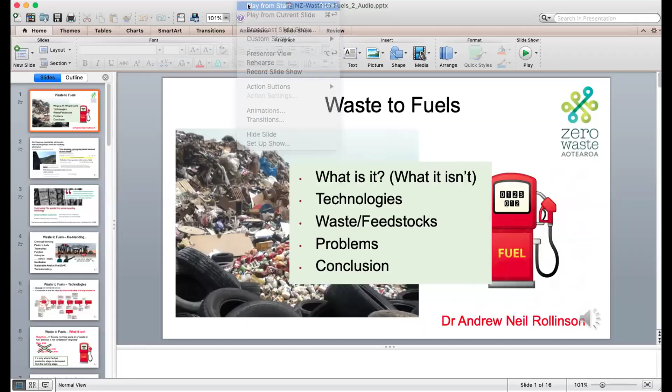Good evening, everybody. Firstly, I want to say what a pleasure it is to be here starting this series of presentations on waste to fuels, and to be working again for Zero Waste Aotearoa. My name is Dr. Andrew Neil Rollinson. To give you a little bit about me, I obtained a PhD in chemical reactor engineering, energy from waste, in 2011. I worked in academia for a number of years with gasification, and for the last 10 years I've largely been helping environmental groups across the world as a technical advisor.

In this presentation, I will be describing what waste to fuels is, the technologies, the waste, the feedstocks, the problems that there are, and I will finish with a conclusion.

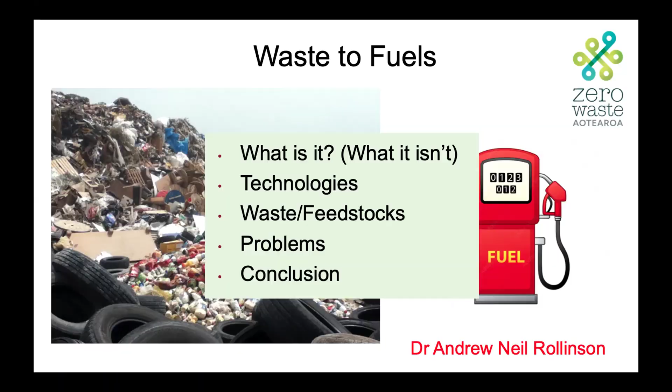This is a different type of technology - sachet recycling in Indonesia using a solvent. This was a plant that was suspended in 2021, and you can perhaps read the quote in the top right-hand corner: someone visited the site and saw bright blue effluent coming out of the facility, flowing into an adjacent river. I'm showing you these news articles because I hope in the next number of slides you will get an understanding as to why these plants close and what these news articles are referring to.

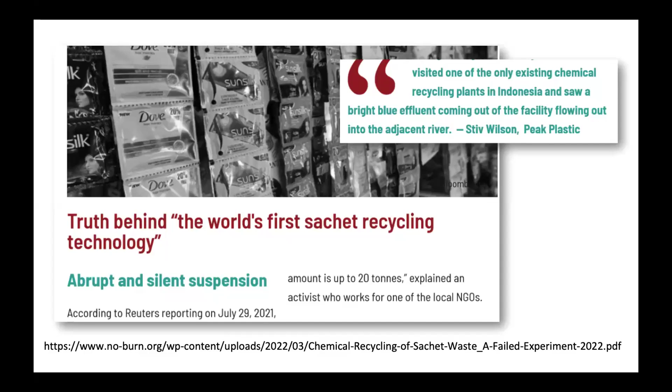Firstly, there are some semantics surrounding waste to fuels. It's often called chemical recycling or plastics to fuels, with a number of terms ending in 'olysis'. Olysis is Greek for change. So thermolysis is changed by heat, pyrolysis is changed by fire, and solvolysis is change using a solvent. There are other types of olysis, usually starting with the name of the solvent used, such as glycolysis or methanolysis.

Gasification is a form of pyrolysis, and there are industry jargon terms for aviation fuels. I have intentionally finished with thermal cracking to highlight that these are not new technologies.

They were experimented with in the 1950s. Plastic had been created then, and engineers and scientists were looking at whether this plastic, rather than sending it as waste to a landfill site or an incinerator, could be converted into something more useful, such as a vehicle fuel or a new plastic.

It was called then thermal cracking - the thermolysis and pyrolysis versions were called thermal cracking. These technologies were rolled out at large scale by the petrochemicals companies in the 1980s and 90s, and all abandoned for technical reasons. So the point I'm making is what you're seeing here is not a new technology - it's essentially a rebranding of an old technology that was trialed and failed for technical reasons.

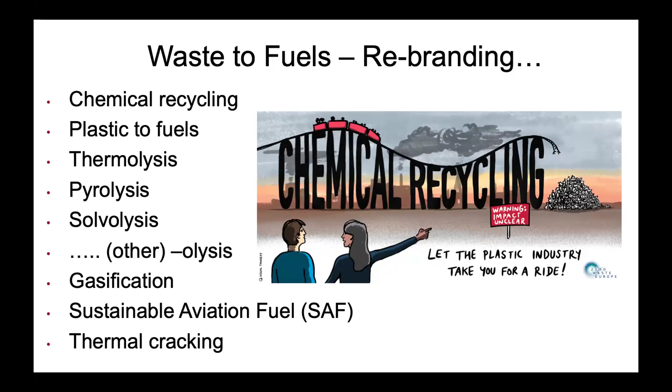What's important to remember is that these technologies described in the previous slide are not recycling. They represent the first of a long processing line, so what they produce is not good enough to be made into any quality fuel. It needs extensive upgrading involving lots of fossil fuels, emissions, hydrogen, catalysts, etc.

And it's a chemical process, not mechanical. You may have heard of mechanical recycling, where plastic is just melted down into fragments and then remelted and reshaped into a new material. This is a deeper type of recycling involving chemicals.

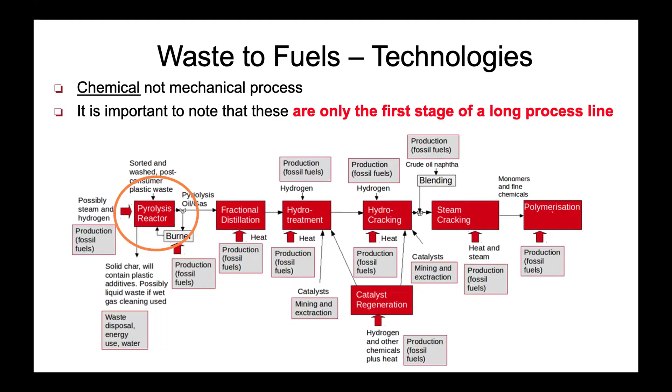What waste to fuels isn't, is recycling in Europe. So burning waste in a waste to fuel process is not legally recycling in Europe. It's a grey area whether incineration, waste to energy, or energy from waste - other terms for incineration - could be considered waste to fuel, because it's essentially used as a fuel to generate electricity. But in this presentation, I won't discuss these any further.

What I will define waste to fuels as is only where the fuel production stage is decoupled from the burning stage, which I hope makes sense. So it's to make something that can be later used as a fuel.

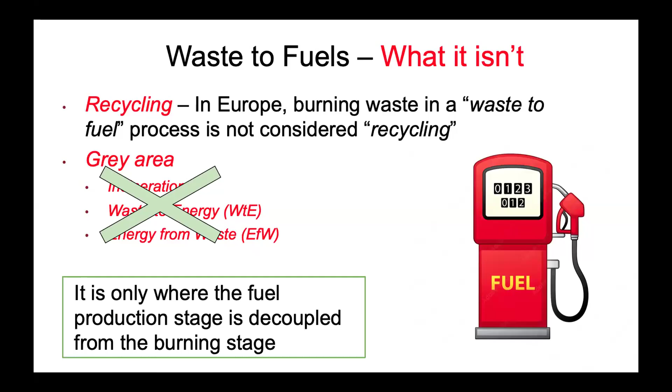A number of feedstocks from waste have been proposed: municipal solid waste, which includes domestic or commercial waste, single types of plastic, mixed plastic, end-of-life tires, sewage sludge, processed waste, refuse-derived fuel or solid recovered fuel. That is a reconstituted municipal solid waste, so it will have been subject to shredding and the removal of certain materials like metals or perhaps some chlorine, but it's still highly mixed, highly heterogeneous.

I've placed in red there biomass, biodiesel, and bioethanol. Now, these are established biofuels, often from agricultural crops rather than waste, and for that reason I have set them outside the content of this presentation.

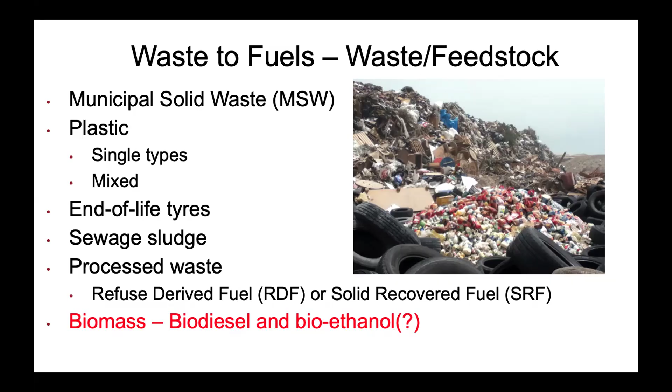Pyrolysis then, let's go into details - what is pyrolysis? Many of the techniques are based on pyrolysis. So look at the picture of the match: strike a match, and then a flame is produced. But the flame is not the burning of the match stalk itself - it's the burning of gas coming off the match stalk, and that gas is pyrolysis gas.

The same happens with the burning of logwood on a fire - the flames that one warms oneself with are the burning of pyrolysis gas. So pyrolysis is an early stage in all combustion.

So with engineered pyrolysis, the principle is to set things burning, but then stop oxygen getting in, so that over a number of days, in terms of charcoal production, the material will smolder away and produce an oil and a gas. You can know this from when you snuff out the oxygen in a fire or stove, your chimney gets a tar substance in it - that tar is condensable pyrolysis oil and gas.

So the oil goes on to be upgraded into fuel when these technologies are used for waste fuels. The gas can be burned as a fuel with the oil directly, and the char is also combustible, but that should not be used for waste because it contains a lot of toxic elements.

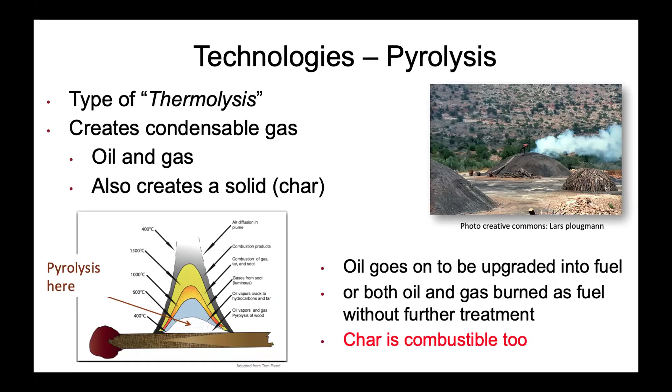Gasification is pyrolysis plus. It's pyrolysis at its core. It is a little bit different because in the 1920s and 30s, when this technology was at its peak, lots of ingenious investigations found a way to make the gas a little bit cleaner so that it could power an engine. It's not a simple process, but that is what the gasification route to waste fuels does. It uses ingenious reactor design, and here the gas rather than the oil is sent off for later processing to be used as a fuel.

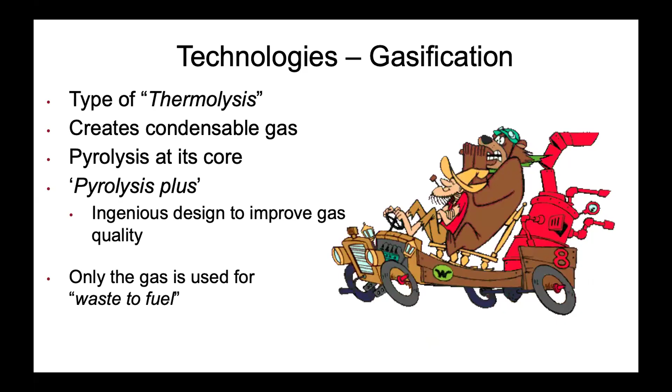Solvent-based techniques still use heat, still use pressure, so they could be a form of thermolysis, but they use chemical solvent to dissolve, I'd say in all cases, plastic, ideally single types of plastic. They may use a catalyst, they may use hydrogen, and that produces a substance that can be stripped out of the solvent mixture and essentially, in theory, sent for further processing to be used as a product.

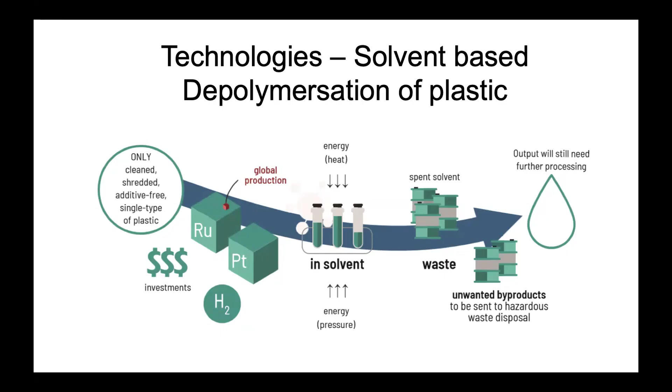Looking at pyrolysis problems now, I'd say that there are three. The first one is it's energy consuming. It's endothermic. It needs a lot of fuel to heat the reactor. Some of that could be supplemented by burning the gas and oil itself, but that obviously reduces the efficiency of the process. But usually it's natural gas that's burned in copious amounts around a pyrolysis reactor.

The second, perhaps more fundamental problem, which the quote shows there from 1871, 150 years ago, it's fully established, it's well known that pyrolysis does not break down materials into the building blocks from which they were first created. It gets to a certain point, just short of the optimum for breaking down products, where different reactions take over and they produce unwanted chemicals. In this case, we're talking about polycyclic aromatic hydrocarbons and dioxins.

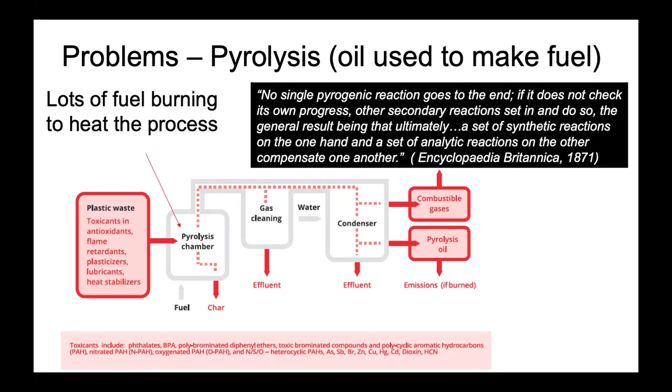Now, the gasification process uses the gas as a fuel, as I've said, rather than the pyrolysis process using oil. It cannot tolerate heterogeneous feedstock. This has been known for 100 years. It's to do with how the material is fed into the reactor and how it packs in the reactor, stopping heat flow and causing the gas to be unclean.

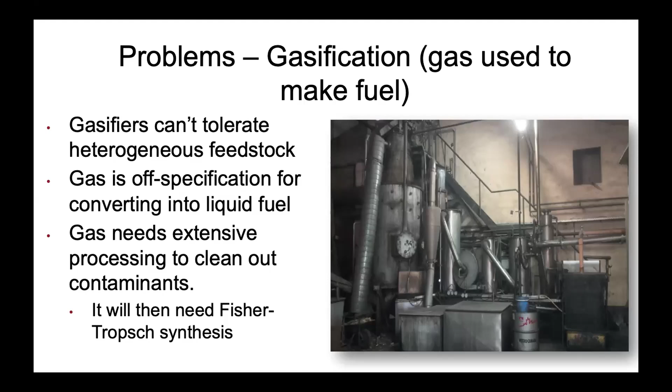There are different types of gasification reactor, but they all have their issues. But in short, the gas would need extensive processing to clean out contaminants before it can be made into, for example, an aviation fuel. Now, this is the route for aviation fuels, gasification followed by usually Fischer-Tropsch synthesis.

Now, with sustainable aviation fuels, the bar is raised very high because the fuel, for safety reasons, needs to match very strict standards, understandably. But the fuel also has many other uses on the plane, such as driving hydraulics. And because of the cost of jet engine aircraft, it must be a drop-in type alternative to kerosene.

So the gas, as I've mentioned, is too off specification for Fischer-Tropsch synthesis. As you can see from the quote there, impurities from waste such as nitrogen, chlorine, sulfur, tar, and soot would deactivate the catalyst. The unsuitable hydrogen and carbon monoxide ratios need gas cleaning stages on top of other additional processing.

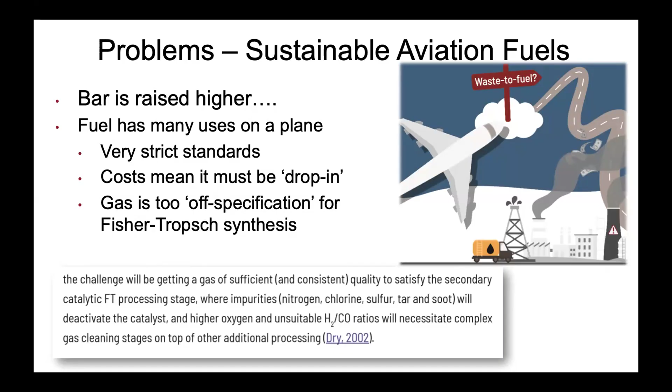Solvent-based methods have their own issues. They require lots of solvent. Industry doesn't usually admit this. They say it's for proprietary reasons, but the ratios are about 10 or even 30 to 1, the amount of solvent per amount of waste. And these solvents are hazardous. They can be regenerated, but regeneration needs energy input.

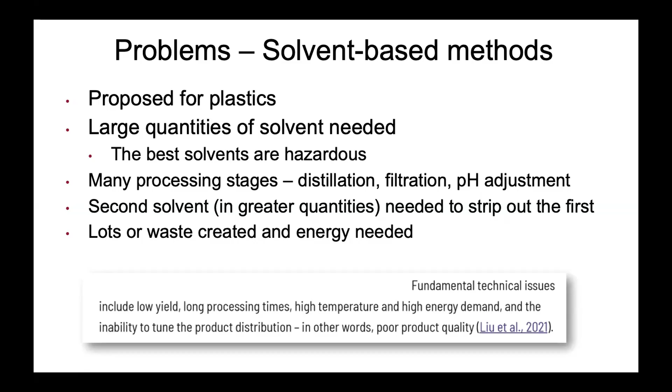For fundamental reasons, I hope I've shown you that yes, you can make a crude oil or a crude gas from waste. But unless you just burn it directly, close coupled to the reactor, you cannot make it into an alternative to vehicular fuel because of the poor quality of waste.

As the title says, you cannot simply turn rubbish into gold. All the additives in it, and also because of the nature of the processes—pyrolysis, solvolysis, and gasification—they

are not suitable for doing what industry wants them to do. Now, you can tag on lots of processing at the end. It might be achievable, but the economics are going to be unfavorable. The waste production is going to be high.

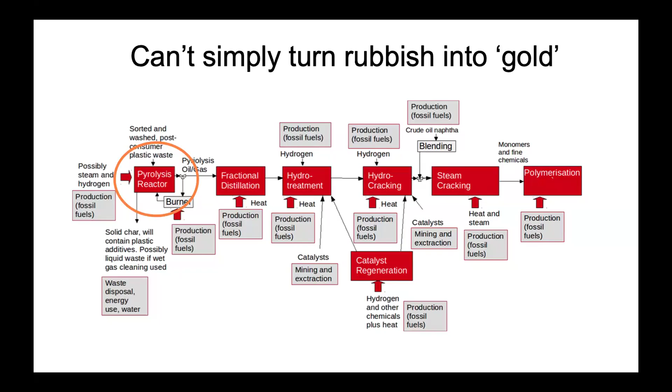The amount of energy needed is going to be high, and it totally undermines the sustainable claims of the process. Now, this is all because of what's called the second law of thermodynamics. You break something down, you've got to rebuild it again. And the more complex the substance, the more difficult it is to rebuild. It's called entropy. I'm not going to explain this in more detail, but it's basic engineering fundamentals.

So if you want to do something with waste, the most sensible option is to minimize its complexity. Remove or disclose plastic additives. Currently, there's no mandatory right for industry to disclose the additives it puts into plastic. Design for recycling, improve upstream source separation, or make products that are repairable.

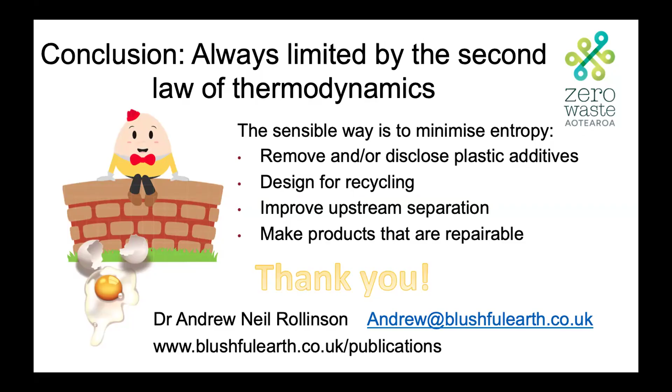Oh, thanks so much, Andrew. That's great. Really appreciate your diagrams for showing us how many processes exactly you have to go through after that initial one. Really gives you a feeling of how complex these processes actually are.

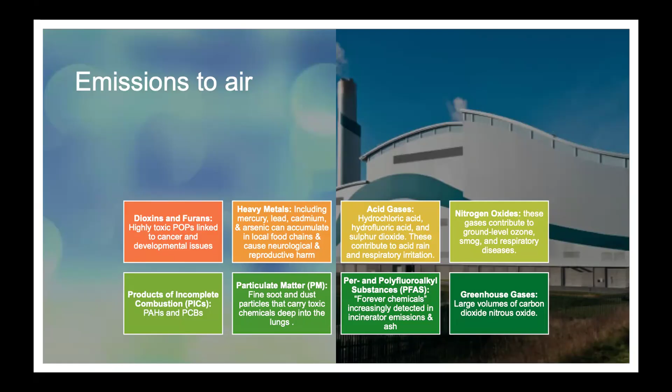Included in this is sort of nanoparticles. I want to talk about this because, being so invisible—even more so than microparticles or microplastics—these nanoparticles really fall off the radar because of their invisibility. And because they're so small, they are very difficult to research, including sources, pathways, fates, impacts, exposures, and so on. So nanoparticles from waste to energy incinerators are ultrafine particles, less than 100 nanometers in diameter.

They're emitted into the air from the burning of consumer nano waste, or waste that becomes nano waste, or they're formed during combustion. Their primary hazard lies in their ability to penetrate deep into the lungs, into the bloodstream, and carry toxic chemicals directly into the body's organs. This creates oxidative stress and disease at the cellular level. They can disrupt critical cell functions, impair mitochondrial activity, and generate reactive oxygen species, or ROSs, that lead to severe inflammation, and they've been linked to increased respiratory and cardiovascular disease.

And then, of course, I have to talk about the environmental impact, and we know as New Zealanders that when we harm the environment, we harm us—there is no distinction between the two. When nanoparticles escape the plant, they settle into soil and into aquatic environments. So we always need to think, when looking at consents for these things, that there are different pathways—it's not just to air, which is often the way these are consented, but also to water and into soils, in aquatic environments.

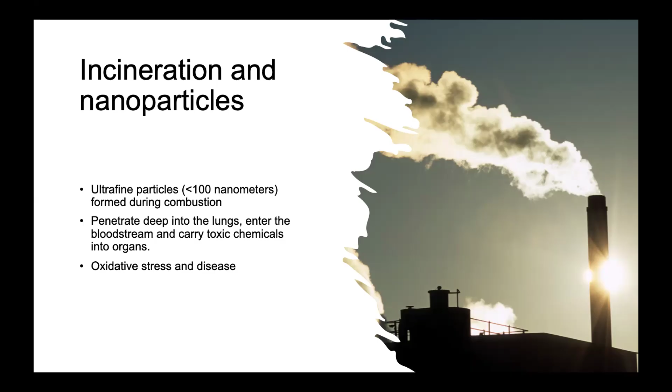These technologies are often referred to as landfills in the sky. Essentially, we're just transferring the waste in solid form into another form of mass. So the amount of municipal solid waste appears to most of us to be greatly reduced when it's incinerated, but no technology can make things simply disappear. Mass can neither be created nor destroyed, it can only be changed.

The gas, smoke, liquid, and solid waste that leave a facility will have the same mass as the solid materials entering the facility. Masses of gas and particulates will go up the stack, toxic ashes and solid waste will need to go to landfill, and liquid waste will also need to be managed.

And then there's the chemical emissions as aerosols from the emissions and fumes and so on. Emissions to water are quite often forgotten about when consents are submitted. Dioxins can be found in scrubber water effluent, where wet scrubbers are engaged to strip flue gases.

If we assumed a plant feeds 40 tonnes of municipal solid waste feedstock, an equal amount of water would be needed, including to clean the feedstock to the point it could be utilised in the plant. So 1 tonne of water per 1 tonne of waste. Operators seldom announce how liquid effluent will also be safely disposed of.

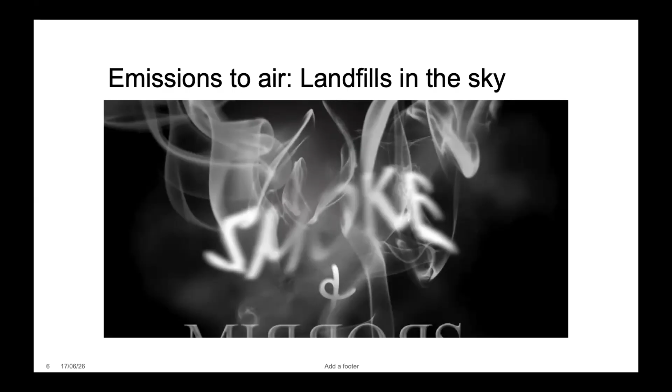We need to think not only about these emissions I've just noted, but also what happens in terms of residuals, the spent scrubbers, filters, and so on, once they've got past their due date. Scrubbers are designed to filter out harmful substances from the exhaust gases, concentrating pollutants like lead, mercury, cadmium, and POPs such as dioxins and furans.

The sludge from the filters is highly corrosive and alkaline. The toxic chemicals and salts in the sludge can easily leach into soil and groundwater if untreated and exposed to rainwater. In many jurisdictions, such as the EU and the UK, air pollution control residues are strictly classified as hazardous waste and require specialised management.

Because of its toxicity, the scrubber sludge generally can't be dumped into standard landfills, and it will require stabilization or solidification - often mixing it with cement or other binders before it can be securely deposited in hazardous waste sites. So it's also where it goes at the end that we need to think carefully about.

Particularly when proposers of these technologies are proposing that their scrubbers, for example, can remove 100% of endocrine disrupting chemicals, can remove 100% of particulates, and so on and so forth.

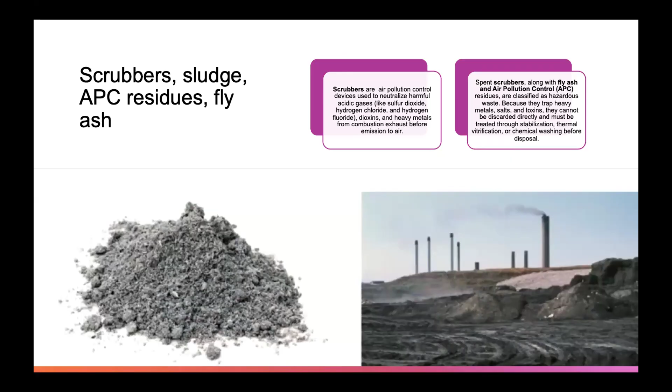There's been some really interesting new research studies that have now detected persistent long chain and short chain PFAS compounds, such as PFOS and PFOA, in ash. Wet flue gas treatment systems capture some semi-volatile PFAS from the exhaust and then transfer them into wastewater. Even in modern waste-to-energy plants, some PFAS are not fully degraded and they can escape into the atmosphere or form byproducts of incomplete combustion.

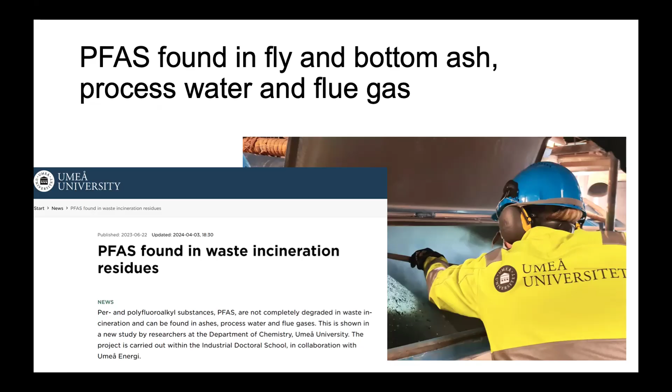Microplastics are also found now in bottom ash, fly ash, and in soils. Bottom ash is that heavy, coarse residue that settles at the bottom of the incinerator furnace, whereas fly ash is that fine, lightweight particulate that's captured in the exhaust filtration systems. Because fly ash captures toxic pollutants from flue gases, it's highly hazardous. Bottom ash is also hazardous, but generally less toxic, and still problematic.

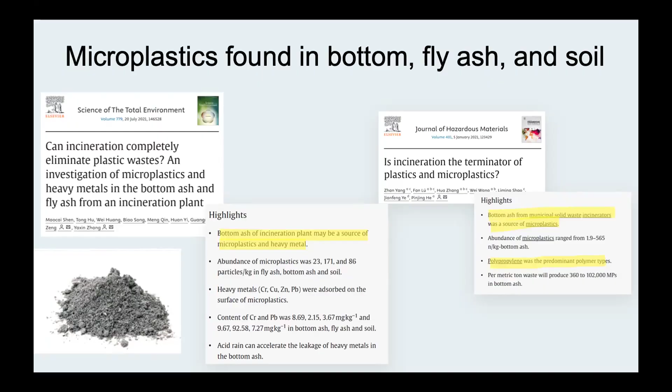Toxic emissions such as dioxins, PFAS, and heavy metals were measured in environments surrounding this area. Key biomonitoring and environmental studies have specifically documented dangerous contamination in soil, water, and food near facilities, including in Lausanne, but also in Harlingen, Netherlands, Ceuta, Spain, Paris, France, Phuket, Thailand, and Brooks, Oregon.

And the communities in the area have experienced significant dioxin and furan soil contamination. They've done a lot of biomonitoring there involving soil sampling, vegetation analysis, and human serum studies.

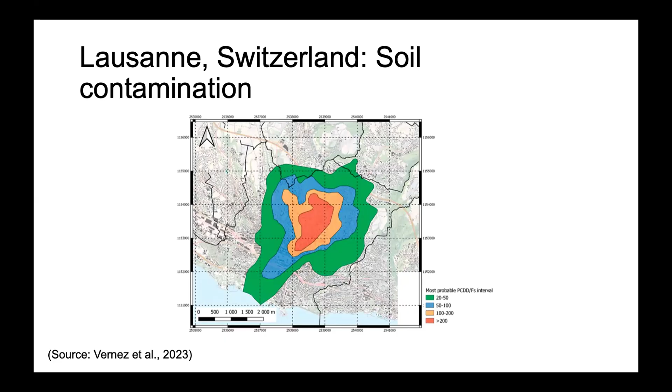These studies have identified elevated pollutant levels, primarily driven by the consumption of local produce, including backyard eggs. Speaking of eggs, in 2023, millions of residents across 400 municipalities in the Greater Paris region were warned by health authorities to avoid consuming eggs laid by backyard chickens. This alert follows studies confirming widespread soil and egg contamination by highly toxic persistent organic pollutants, those POPs, including dioxins and PFAS linked to nearby waste incinerators.

Similarly, in several European countries, cow's milk from farms located in the vicinity of incinerators have been found to contain elevated levels of dioxins, in some cases well above regulatory limits.

I won't go into this in detail, but just to alert you to the quote here around the Harlingen example. Now, these are not old, outdated technologies we're talking about here. I've actually chosen some of the more recent technologies. We often hear comments from plants stating that this is state-of-the-art modern technology with excellent filtration systems, and therefore the problems that we've seen in the past that are now published are no longer relevant today. I'm just here to tell you that the examples I'm drawing from are quite modern, and these incinerator plants are referred to as state-of-the-art.

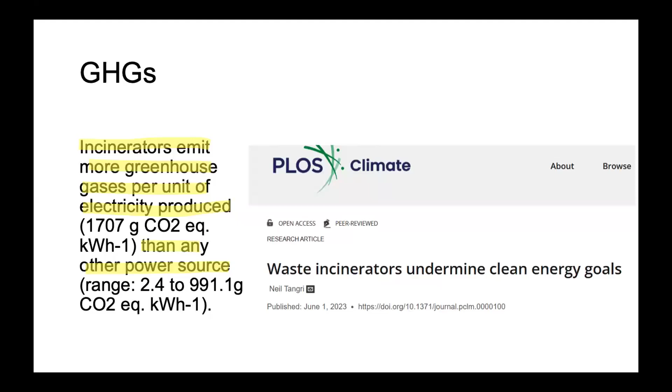There is also a lot of growing interest in the healthcare costs of incinerators, which I won't go into the details of due to time. Here's an example: a study by the Chesapeake Bay Foundation estimated that the Baltimore plant alone drives $55 million a year in health damages. Another study attributed $21 million in health and mortality costs to the same incinerator due to airborne toxic metal inhalation.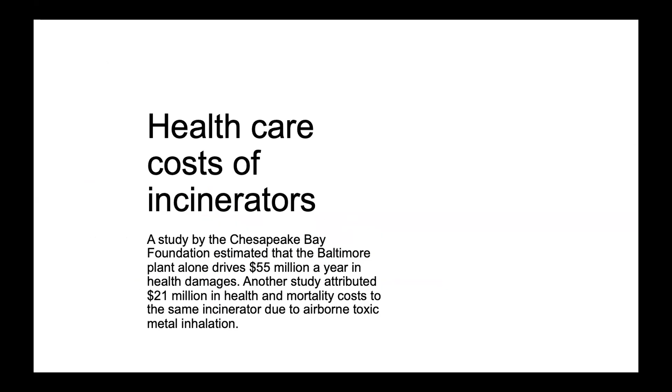So these are just some questions I want to finish off posing to all of us for our consideration. I want us to think about: at whose cost is it to prove waste to energy technologies are or are not safe and sustainable, and remain safe and sustainable.

There are a number of us on this call who've probably spent hundreds of hours dedicated to fighting yet another waste to energy plant that's popped up somewhere else, the latest being TNG in Fiji, all voluntarily done. Andrew has done some incredible, very generous dedication of time to this. I'm sure most of this is really voluntary and off your own bat, so thank you for that.

But really, the cost is: is it our burden to carry the cost of proving the safety and sustainability of these technologies, or is it theirs? If it's theirs, we need to think about how that needs to be set up. Who also bears the externalized costs of those technologies when they're in play? Who gets to clean up contaminated sites when they're closed down? Where are the independent science and technology bodies?

Andrew mentioned the lack of standards. We need independent bodies of scientists and experts, including frontline, fence line communities who know firsthand the impacts of these on their health, particularly respiratory health. And where are the globally harmonised and evidence-based standards that Andrew was referring to, but also local standards, national standards, and global regulations? Next slide, please.

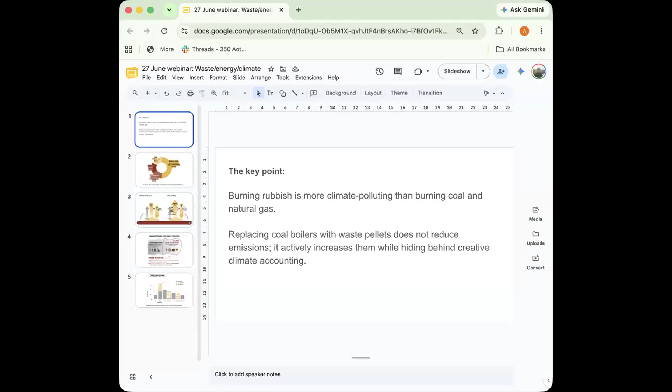And now we're going to move on to Adam Curry. He's from 350 Aotearoa, the New Zealand arm of 350.org, which focuses on climate change solutions. Adam's been campaigning for climate justice since a big storm sent waves crashing through his community, bringing that problem home. He's here tonight to speak about climate accounting and the energy security issues we're facing with these plastic to fuel proposals. Yeah, so welcome, Adam.

Cool, Kira, thank you. You can see the presentation, I think? Yeah.

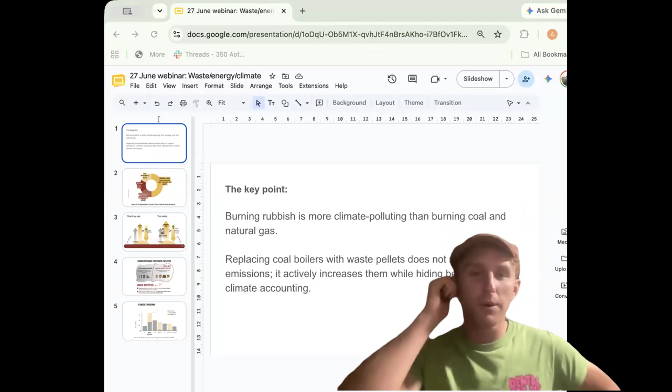It basically relies on one word they love to throw around, which is biogenic. So what is biogenic? Biogenic is organic, right? Biogenic carbon is organic material, things that are grown — wood, paper, cardboard, food scraps, green waste. So when waste is processed or burned, companies treat that grown biogenic portion as carbon neutral or renewable. And that's really important because, as you can see here, this is an American number, but it's roughly the same in New Zealand: about half of waste is biogenic waste, right?

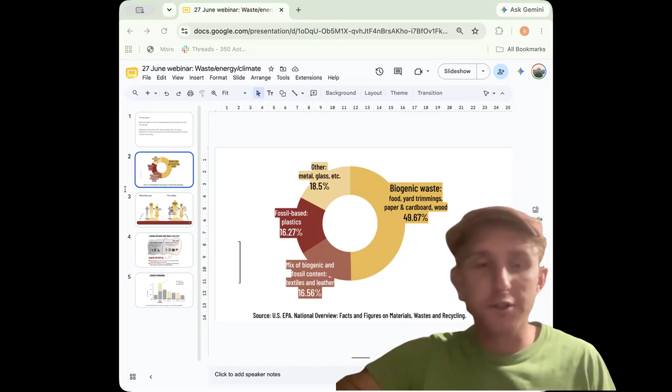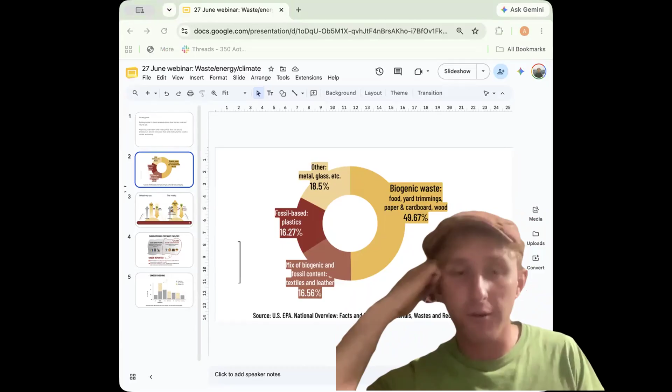So if half of the carbon we're writing off, that's a pretty bloody big issue. It is really significant. And of course, if that half is labeled renewable and it's not renewable, then you're only reporting that fossil-based plastic portion on your balance sheets, and so it takes up half a waste stream. I'll try not to straw man the argument of the waste incinerators, which is difficult because it doesn't rest on very much. But effectively, they're arguing that this organic trash is free from the emissions trading scheme, free from climate rules, and free from responsibility. And in some places, they want renewable energy subsidies for it.

So why? Ultimately, the logic is what we are burning is organic, right? It grows. So we might be releasing carbon now, but it's natural because it was once absorbed, and so it's all circular. And that makes narrative sense, right? It makes a lot of narrative sense, which I think is why, without getting into specifics, that narrative has done quite well. But of course, the issue with that logic is that it's not true because there's no evidence that it works that way. So we'll start off with the obvious.

Right now, that biogenic, that grown waste is sitting mixed in with all the other trash, right? You've got your garbage bag, it's got a few banana peels, a few bits of broken glass, a few cups. And if you decide to burn that bag as opposed to leaving it at home or taking it to the landfill, obviously another tree is not going to instantly grow, right? Your decision to burn it, or the company's decision to burn it, isn't going to suddenly make another tree grow. And in fact, if we composted that organic section of the waste instead, it would actually store carbon in the soil, it would help plants to grow, and then it would obviously increase its carbon uptake. So the starting point — that burning the biogenic part makes sense — doesn't hold up.

But let's say it is grown, right? Say for whatever reason — obviously this is nuanced — there's a bunch of reasons why they might say, okay, it might actually grow, and the issue with that is it wouldn't be anywhere near the same level of offset. Think about this: if I bulldoze an acre of thick, mature native bush, and then I go out with my tree-hugging friends and we replant that same acre with tiny saplings, that new land is going to absorb a heck of a lot less carbon than it did before it was clear cut. A regrowing forest with tiny saplings is going to absorb vastly less carbon than a healthy uncut one, both immediately and in the long term. And the long term is what matters here. Einstein allegedly said that the power of compound interest is the eighth wonder of the world.

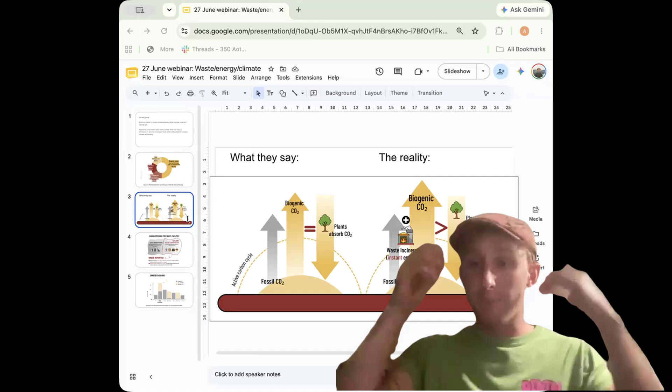Because every minute that carbon is in the atmosphere, it's heating the planet. It's driving climate feedback loops. It's melting permafrost, it's melting the Arctic, which then causes climate cycles to come up, even if it was sequestered later on. And so any policy making that relies on that accounting is flawed, deceptive, and dangerous.

I've put a graph here on the left showing basically what they're saying, which is biogenic goes up, trees go down — trees grow and absorb it. But that's not the way it works, ultimately.

This is also really important because as well as driving feedback loops, it's having all the impact — it's causing lives lost. I think we often forget that we've had climate deaths in New Zealand. We had 17 people die in Cyclone Gabrielle. We know every 1,000 tons of carbon causes at least one death that we can prove, in reality much more. So all those emissions sitting in the atmosphere until a tree is grown and absorbs that, which probably won't happen anyway, is exceptionally dangerous.

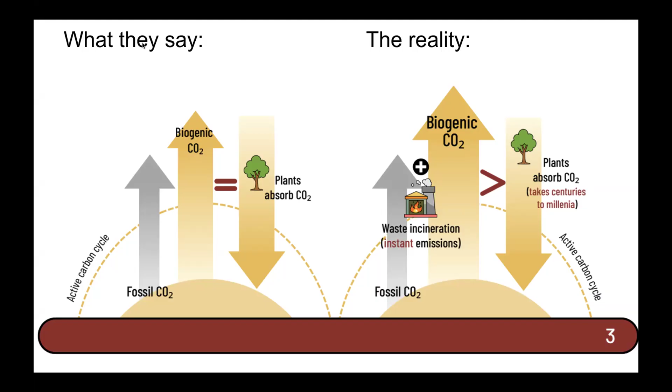This is not solely limited to waste incineration. We also know that landfills emit biogenic CO2 as well. And with that landfill methane, if it's captured and burnt, and they claim it's absorbed and carbon neutral, that resulting CO2 is, in a similar way, also not real. So the emissions are still there as well.

As Val often says, these are not waste to energy plants — they are waste incineration plants that happen to also capture a bit of energy. I think that's the key way to think about this: this is not about producing large scales of energy for our society. This is about waste incineration and all the harms that come from it, and all the reasons they want to burn waste, trying to build social license and get a bit of finance from energy in the meantime. And let's remember that ultimately, this residual waste we're talking about burning is not renewable.